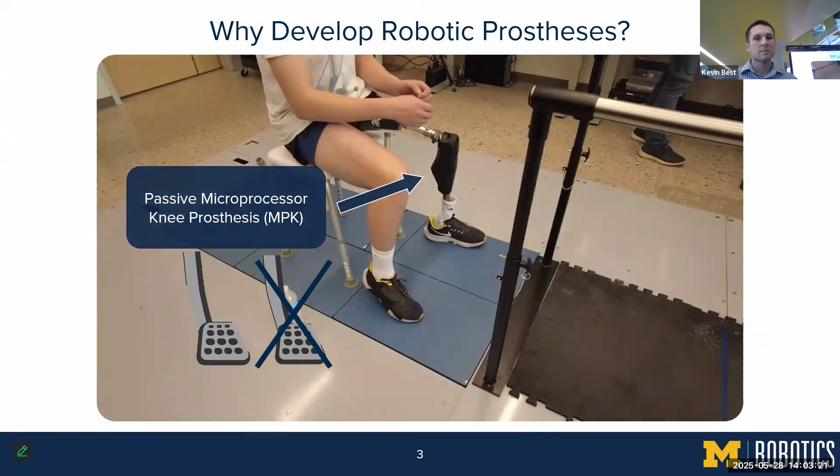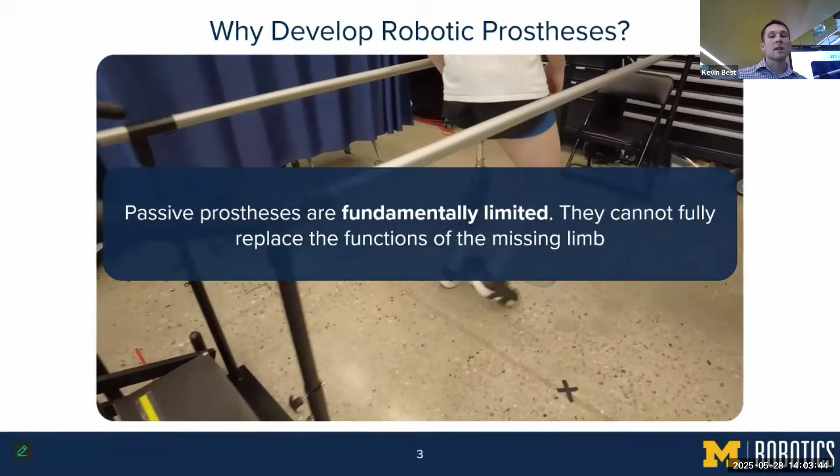This is like in your car if you only had a brake pedal and didn't have a gas pedal. And what this means for the user is that they have to compensate with their intact joints, which can lead to gait asymmetries, increased metabolic cost, overuse injuries, and overall less community engagement. So you can see this participant has to take much bigger steps with his right leg compared to his left, particularly on the ramp. And all passive prostheses, regardless of their complexity, are fundamentally limited. They cannot add energy into the system like biological muscles do, and so they cannot fully replace the functions of the missing limb.

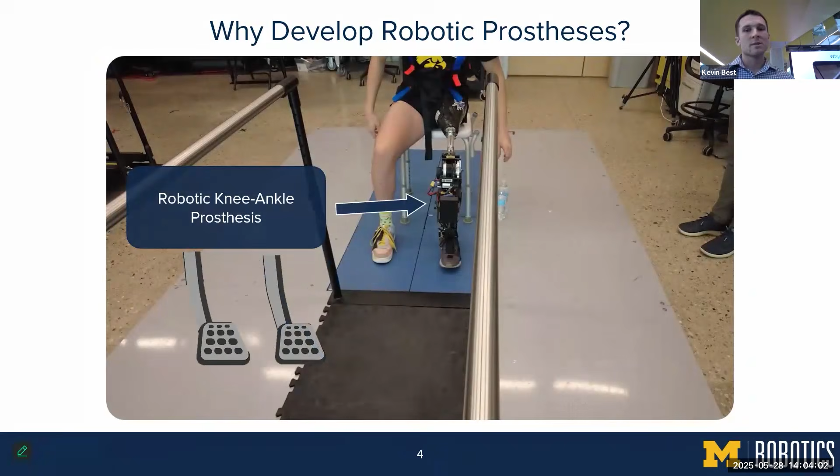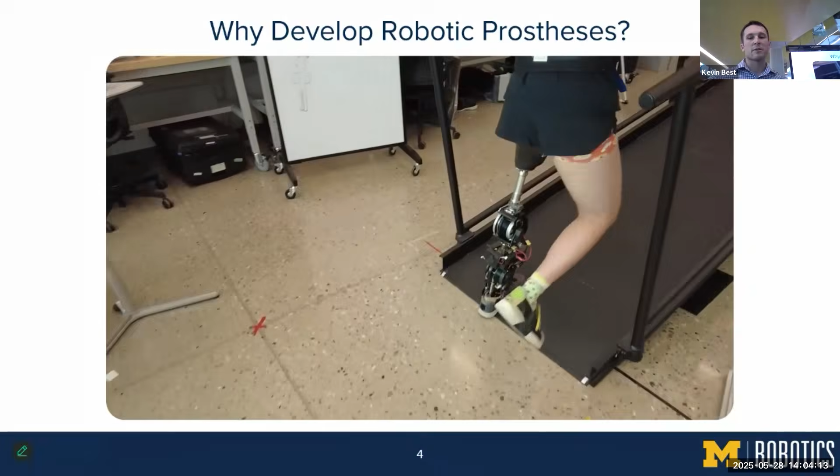In contrast, the motors in robotic prostheses allow them to both resist and create motions. This is like having both the brake pedal and now a gas pedal. And so this helps the participant walk with a more symmetric gait. So you can see that when he gets to the ramp, he can climb with more equal step lengths on both his left and right legs compared to with his passive device. And there are many other potential benefits of this, including reduced energy usage and reduced strain on the intact limb.

So if powered devices have these benefits, why do people still use passive ones? There are only 3 commercially available powered knee prostheses on the market, and none of them have much market share. And as far as I know, there are no combined powered knee ankle prostheses available for consumer use. I'd argue that this is because developing a really effective robotic prosthesis is difficult. There are hardware challenges. It can't be too loud or too heavy.

It has to fit inside pants. These are all real design challenges that are hard to achieve. There are economic challenges. You have to be able to design and manufacture them at prices that the market can afford. And there are also software challenges. It's hard to write control methods that robustly and effectively assist users throughout their day. And this final point is the fundamental problem that I've worked on during my PhD: how do you make these robotic prostheses do what the user wants at the right times in a way that's helpful?

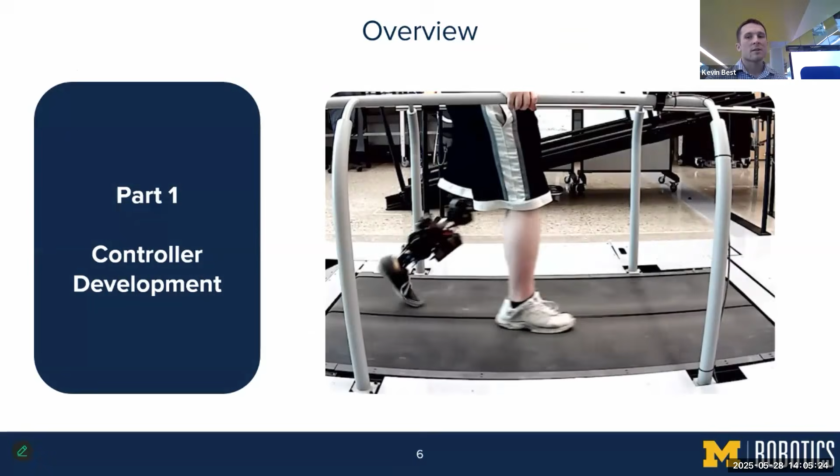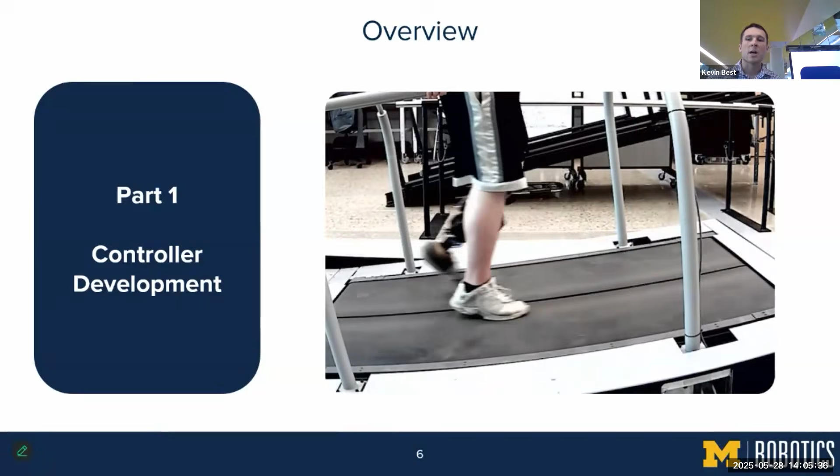In my talk today, I want to share 3 main ways I've been working towards advancing robotic prosthesis control. In part 1, I'll walk you through the control methods we developed to more effectively control a robotic prosthesis while maintaining its clinical viability, and what that means and why it's important. In part 2, we'll look at clinical benefits and explore how the control methods from part 1 can bring tangible benefits to users. In part 3, we'll look at how these controllers respond to gait perturbations that could occur in real-world ambulation, and how our control choices affect the user's ability to withstand them.

Often our goal here is biomimicry. What we mean by that is that we want the leg to behave as if it were a healthy biological limb. So this will be our North Star throughout this first part of the presentation.

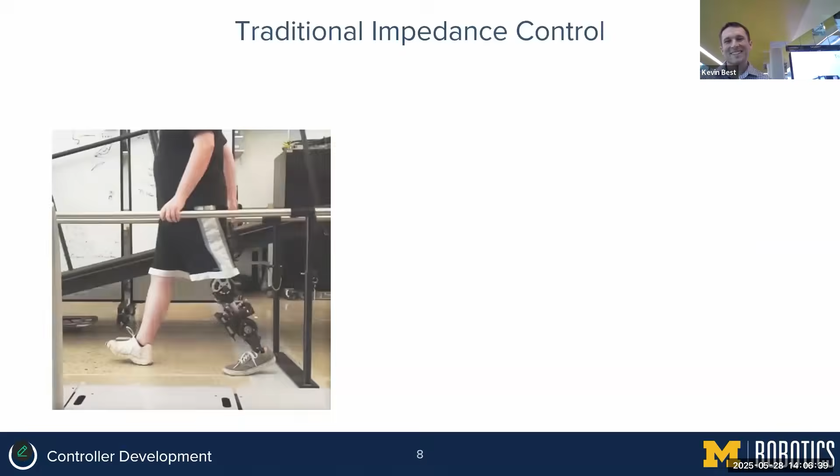A traditional way to select F is to make the prosthesis joints behave like spring damper systems using an impedance control law. It calculates the joint torque tau based on the current joint angle theta, the current joint velocity theta dot, and 3 tunable impedance parameters: the stiffness K, the damping B, and the equilibrium angle theta EQ. To make the leg behave as desired, you change the values of these impedance parameters over time based on discrete gait events.

Often these controllers need user-specific tuning, in which a clinician would watch the user walk and tweak these values until the desired gait is observed. While this can work really well and create fairly biomimetic behaviors, the ideal parameters depend on the activity, which means many parameter sets and tuning sessions are potentially required to get optimal biomimetic performance across various tasks. In a clinical setting, this would be pretty difficult, as it would take a lot of time, equipment, and engineering knowledge that a clinician might not have.

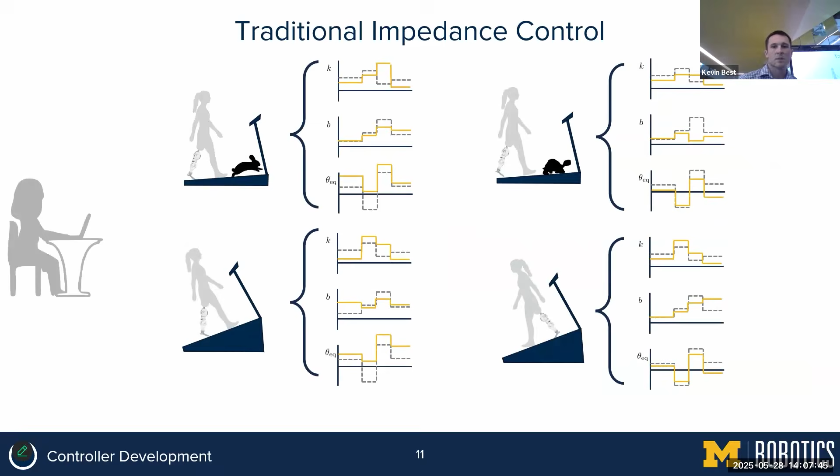I would argue that relying on manual expert tuning to achieve biomimetic performance isn't clinically viable. What I mean by that is if I went to the prosthetics and orthotics clinic and said, hey, I have this great new device, but you have to add 3 to 5 hours to every fitting appointment so we can make it work, they probably wouldn't be interested.

So instead, what we want to do here is create an alternative framework that can still create these biomimetic behaviors, but without that manual tuning burden.

Back in 2021, Emma Reznick collected a data set of able-bodied people walking at various speeds and inclines. Our general approach is to use this as demonstration data to construct a mathematical model of how people walk. Once this model is trained, we can use the sensor measurements from onboard the prosthesis, pass them through the model, and have it output the desired prosthesis behaviors. This way, we can rely on actual data to create our desired biomimicry without manual tuning.

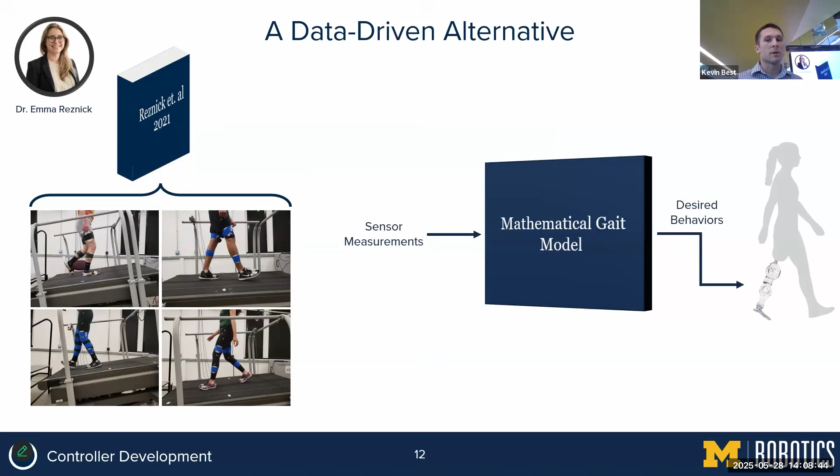So what do I mean by behaviors? In this first work, we used a method that Kyle Embry had developed to model normative joint angles, also known as the kinematics. To control the prosthesis, we would simply take the output from this model, which may tell us that the knee should be nearly fully extended and the ankle should be slightly dorsiflexed, something like that. And we would use the motors to drive the leg to that configuration. This is called position or kinematic control.

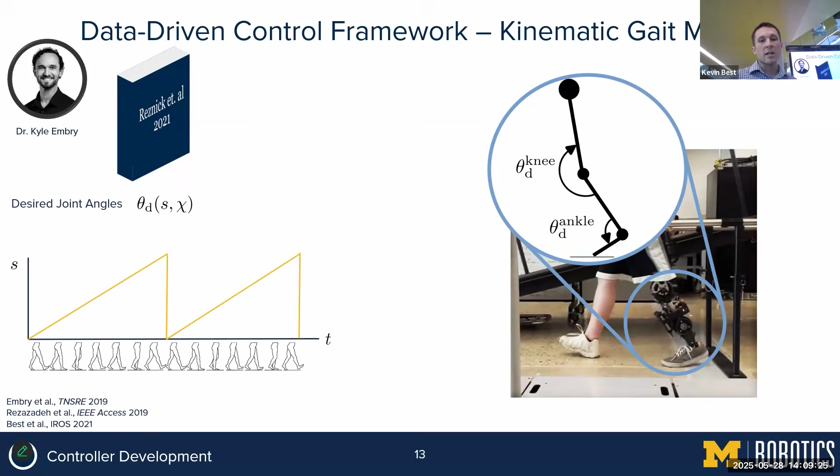And Kyle's model took 2 inputs. The first is a phase variable S, which estimates where the user is within the gait cycle. You can think of S as going between 0 and 100% completion of each stride, and during steady walking, it'll look like this sawtooth wave. Siavash Rezazadeh showed us previously that we can calculate S based on the global orientation of the user's residual thigh, which has this sinusoidal shape during walking.

If we divide this trajectory into two parts, a descending part on the left and an ascending part on the right, and we flip that descending part over the x-axis, we get something that resembles this phase variable. What's nice about using a phase variable is that the user still has control of their thigh angle, which indirectly gives them control over the prosthesis.

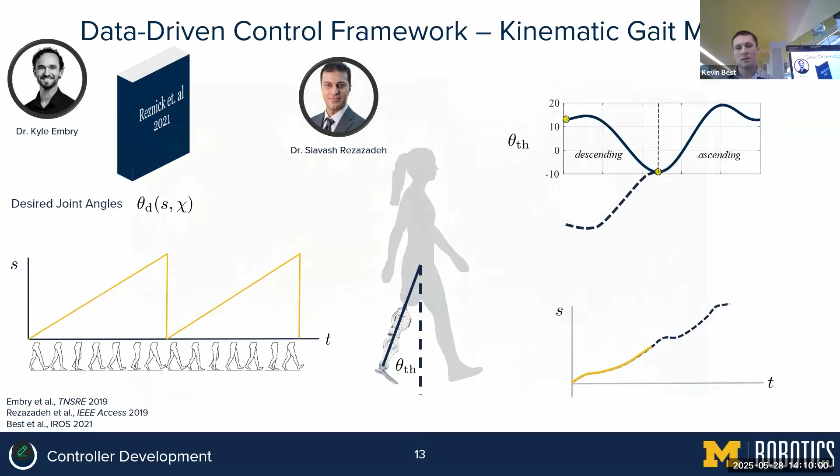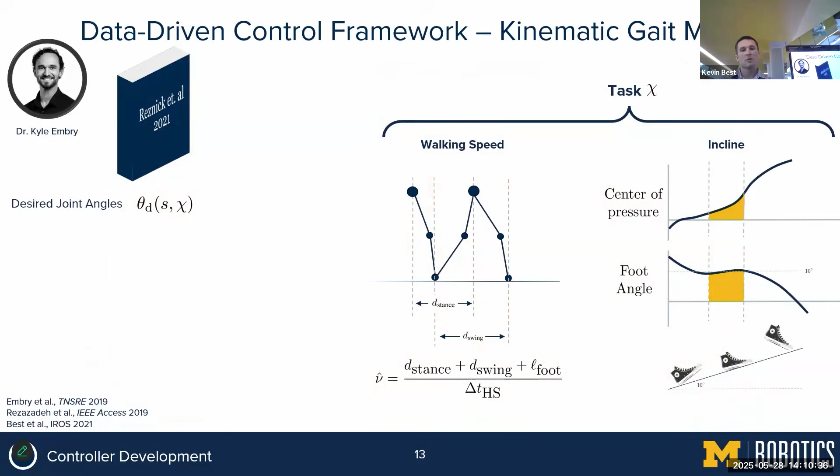So the second input is a task variable, which we defined as the walking speed and the ground incline. And just like phase, we developed algorithms to estimate these online using sensors just from onboard the prosthesis. For time's sake, I'm going to skip over how they work, but I'm happy to talk about them later.

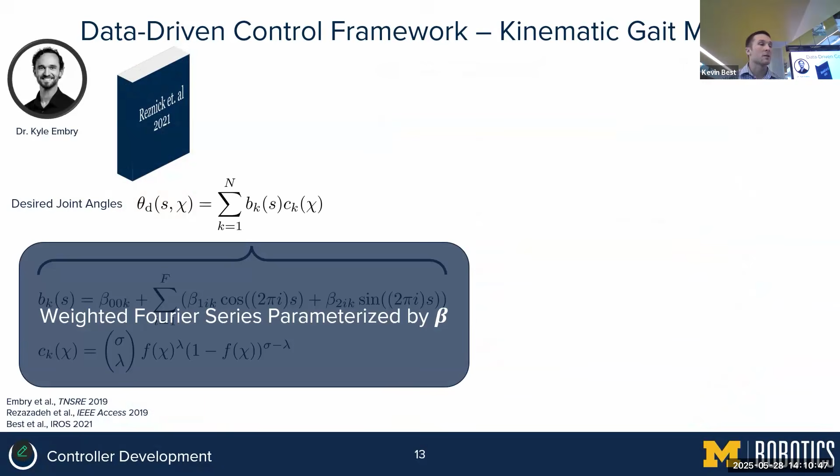So given these inputs, the model computes a weighted Fourier series where the different Fourier terms are dialed in and out based on the task variable. Fourier series are a good fit here because they inherently capture the periodic nature of gait.

So using some convex optimization to solve for these beta terms that parameterize the model, we can fit it to the joint angles in the data set, producing this continuous surface that describes normative able-bodied joint angles and how they evolve across the gait cycle for different speeds and inclines. And then we can simply use PID joint controllers to drive the prosthesis to those references.

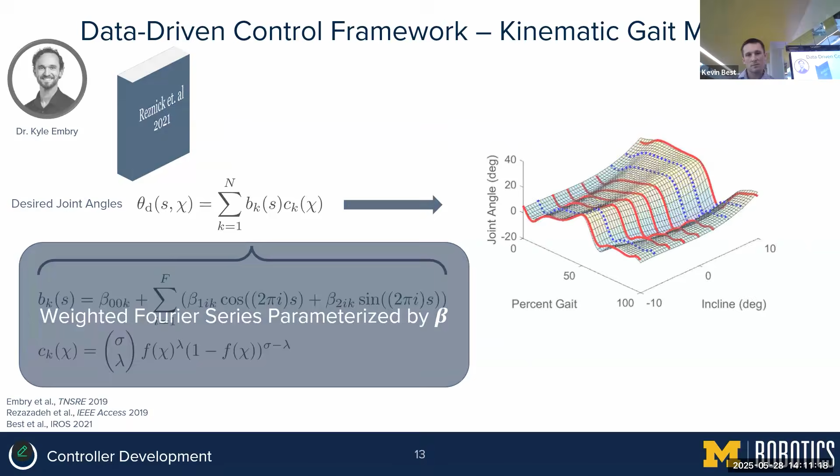So we deployed this controller on the prosthesis and it worked fairly well. It could automatically detect and adapt to varying speeds and inclines and produce the appropriate behaviors. You can see how old these videos are because the floor around our treadmill wasn't finished yet. That's why I'm inside this kind of 2x4 fence.

But while it mostly worked and we presented it at IROS, we did notice two problems that you might have picked up on. The first is the leg appears to pause right at toe off. You can see the knee and the ankle stop moving ever so briefly right when the foot comes off the ground. And this sudden deceleration didn't feel very good, nor was it biomimetic.

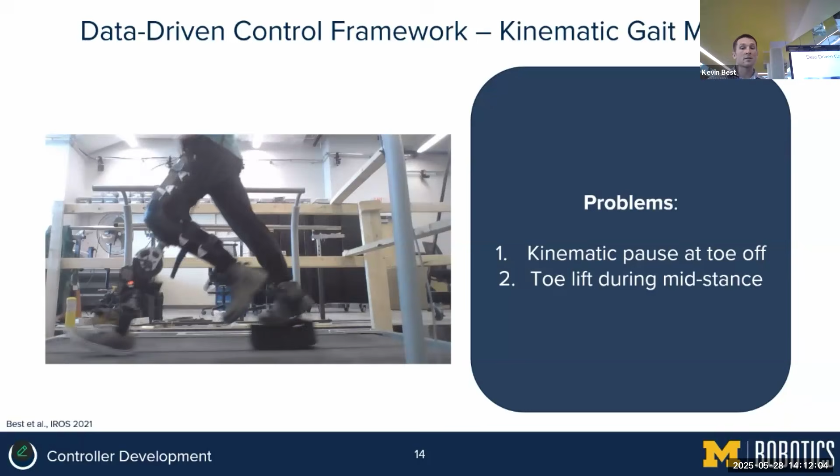Another issue is that the ground interaction wasn't quite right. So if you look closely at the foot during stance, you'll see the toes rise and then fall again, which creates a non-biomimetic ankle torque profile that is unsettling to walk on. That's shown in green. So we tried to address these two limitations in our next work.

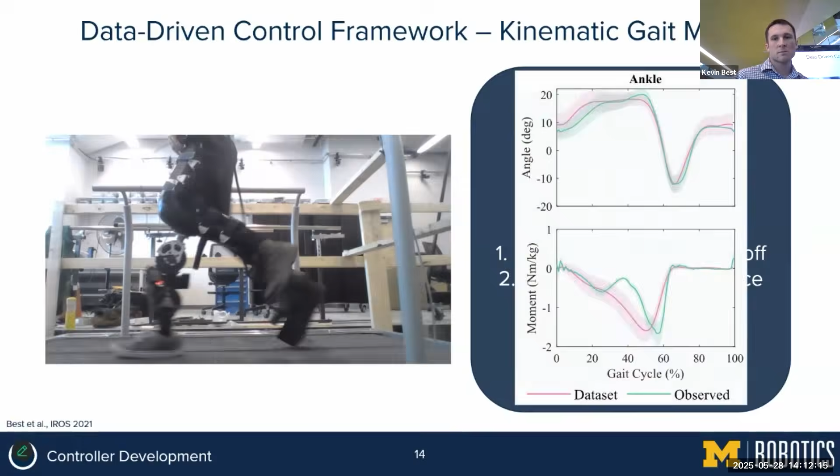The first problem, the joint angles pausing right at toe off, was due to how we calculated the phase variable. This spot in the middle where the thigh changes directions causes the phase variable to momentarily pause, which in turn stops the commanded joint angles from progressing.

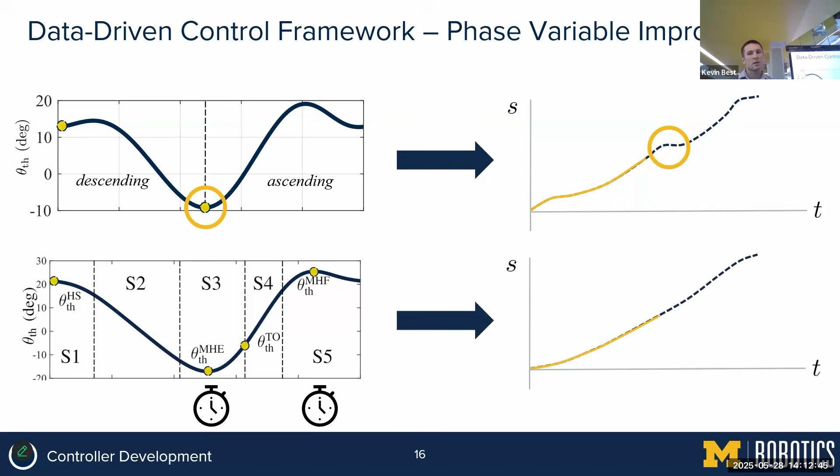To fix this problem, we divided the gait cycle into more sections, and we used time to control the phase estimate progression during the portions of low thigh velocity. And what this did is it removed that pause in the phase trajectory, producing a signal that's more like that ideal sawtooth wave that we're looking for.

To fix the non-biomimetic ground interaction and the ankle behavior, we switched from the kinematic control paradigm to an impedance control paradigm. And we did this during the stance phase because the spring damper behavior of an impedance controller allows the foot to better comply with the ground and create that natural behavior.

So rather than controlling the joints to follow desired kinematic trajectories, we instead controlled their dynamics by modulating the stiffness, damping, and equilibrium angle.

But to make this change, we needed something to replace the kinematic model. So rather than outputting desired joint angles, we need a new model that takes in gait phase and task, and instead gives us stiffness, damping, and equilibrium angle. Remember, these are the parameters that are typically hand-tuned in the traditional impedance control approach.

This time, we chose to model them using a linear combination of polynomials. Since we're only modeling the stance phase, we don't need the model to be periodic. And we chose polynomials because they're good approximators of arbitrary functions, and their parameters enter linearly.

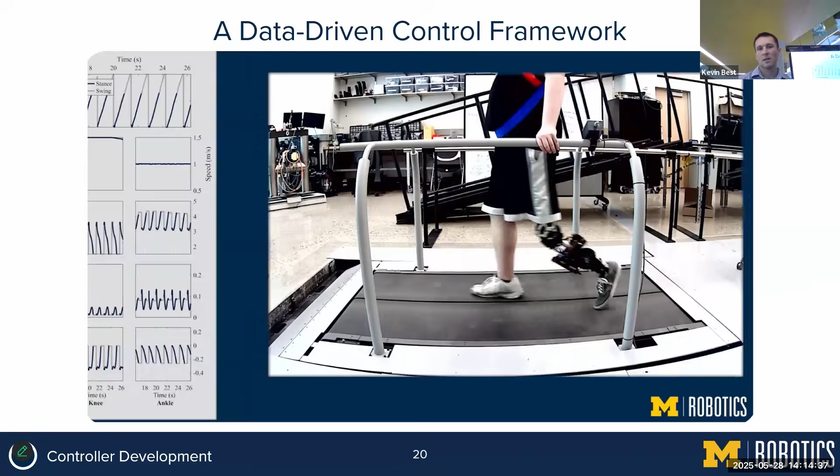We again implemented the controller on a prosthesis and had a few participants try it out. You can see that our impedance parameters on the left are continuously evolving based on the estimated task and gait phase. If I let this video run for a little while, the treadmill will change speed and incline, and the prosthesis's behavior will adapt to match it. Compared to those kinematic control videos I showed you earlier, you can see that we fixed both the pause at toe off, as well as that ground interaction, so the toes are no longer wobbling.

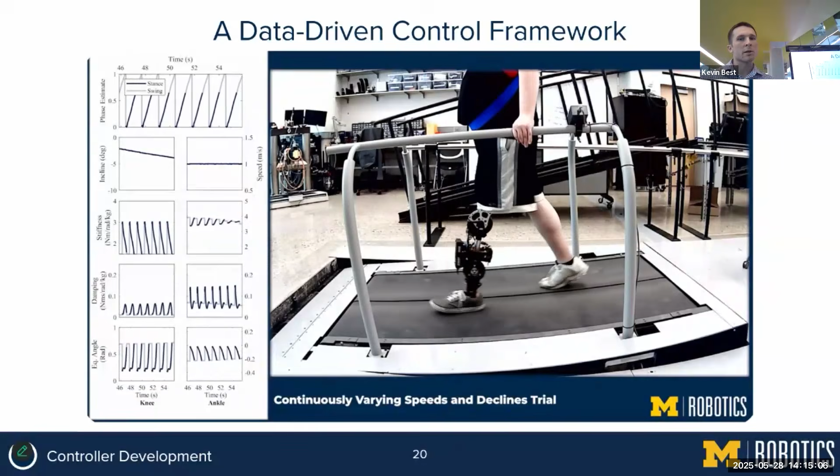To show that we didn't lose any performance relative to the hand-tuned impedance control approach, we implemented both controllers and ran a series of experiments.

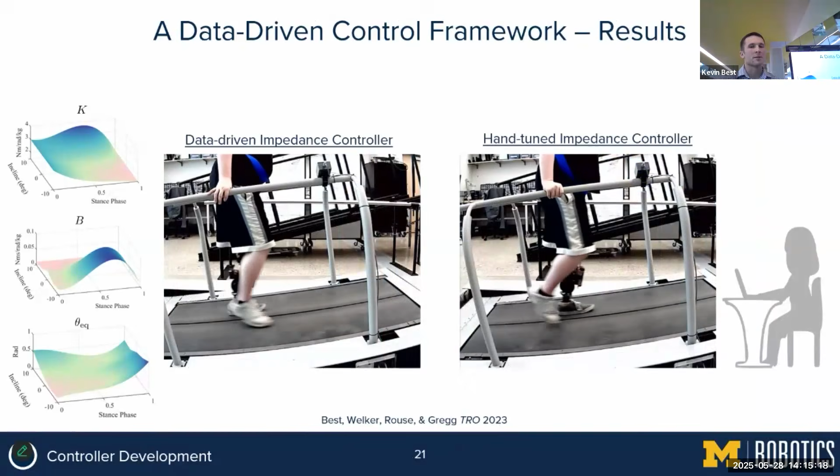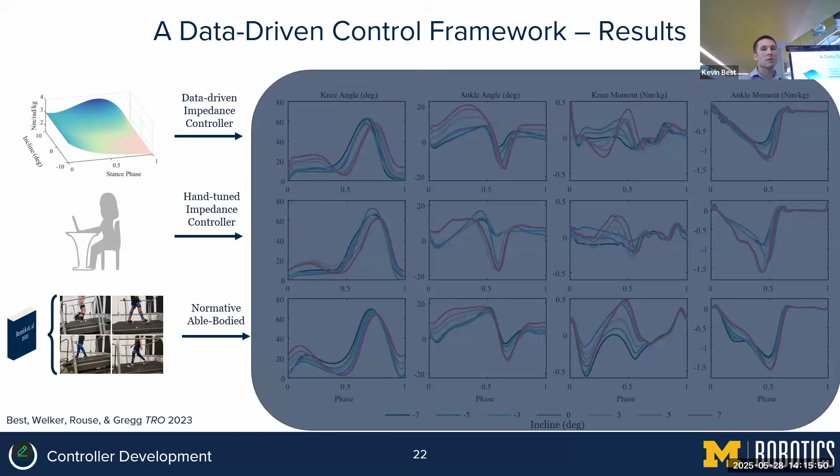When we compared it across both the knee and ankle, kinematics and kinetics, we found that our data-driven approach was as good as, if not better than, the hand-tuned approach of replicating normative able-bodied joint motions. And the key here is that it did it without requiring manual tuning, maintaining its clinical viability.

Following these positive results, Cara and I then expanded this approach to sitting and standing from chairs of various heights. Then Ross and I applied the same framework to stair ascent and descent with similar positive results. So we're able to create these normative biomimetic joint patterns all by learning models based on able-bodied demonstration data instead of relying on manual tuning.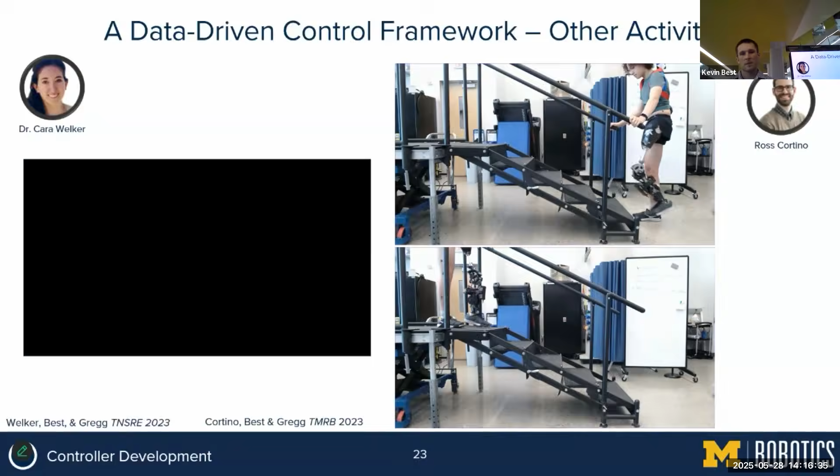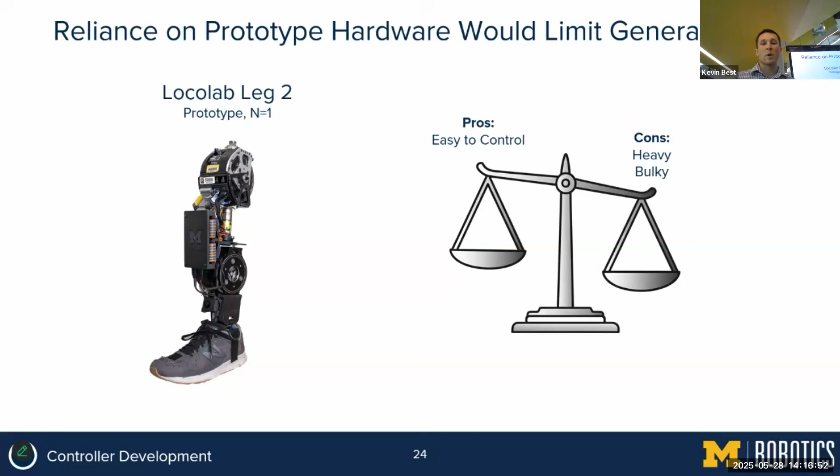While our results were really promising, everything I've shown you so far was demonstrated using the same prosthesis. Leg 2, as our lab creatively calls it, is a device that was intentionally designed for easy control, but it also has other practical limitations of weight and bulk that may prevent the design from going home with someone. And if we want our controller to have actual real world impact, we need to show that it can generalize to other devices, and that its success isn't wholly reliant on this specific hardware design.

I want to give a quick example to help motivate why these hardware properties might matter. One important property is the prosthesis's actuator inertia, which roughly speaking can be understood as its resistance to rotational acceleration. You're likely familiar with adaptive cruise control algorithms, which try to keep a fixed following distance between your car and the car in front of you.

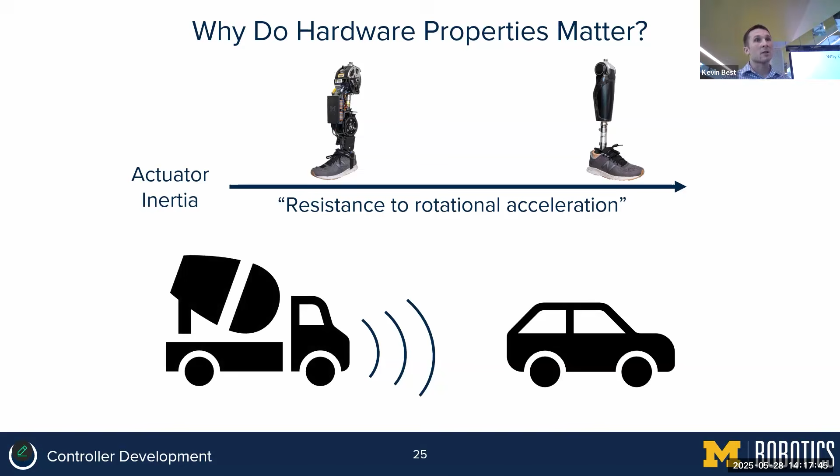Let's say you wrote this algorithm and it works very well for this specific car. If I tried to directly use the same algorithm on a much heavier vehicle, you would likely have problems because it might not brake or accelerate hard enough. You'd likely need to consider this extra weight and modify your control algorithm to get the same performance. So for the same reasons, actuator inertia matters for prostheses.

Leg 2 is specifically designed with minimal actuator inertia, which is part of the reason why it's so bulky and heavy. In schematic form, its dynamics look like this, where the main thing is just inertia, and it's quite small. Other devices we use in the lab, such as the open source leg and the Össur Power Knee, are lighter and more compact, but that comes at the expense of potentially more complex drivetrain dynamics.

So let's take a look inside the open source leg, which Senthur and the OSL team created with specific design objectives that were different from those when leg 2 was created. The whole point of the OSL project is to accelerate research like my own by providing a common and accessible hardware platform to the field.

This means that their design prioritized a low number of custom components, used off-the-shelf parts wherever possible to keep costs down. This makes the OSL easier to machine, assemble, and afford, but it also introduces some complexity to the drivetrain.

Each joint here has its own actuator, shown in this pale yellow color. These actuators have their own internal transmissions, which have their own dynamics. They drive an additional belt transmission that ultimately moves the joints. And it turns out when you load this belt, it stretches.

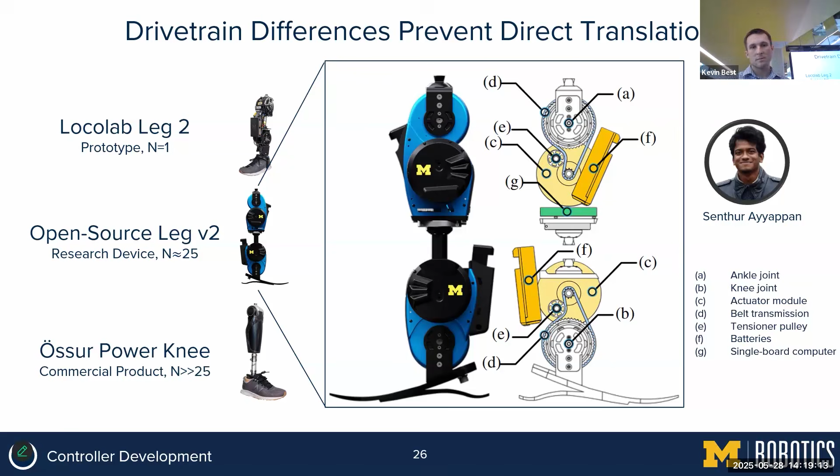So when we characterized and modeled the full OSL drivetrain, we found that its dynamics look a bit more like this, with more inertia, damping, and friction, and this variable stiffness series elastic actuator that we need to deal with.

Luckily, we found that the same model does a really good job of describing the power knee's dynamics. So if we develop a method to account for them, we can apply it on both systems.

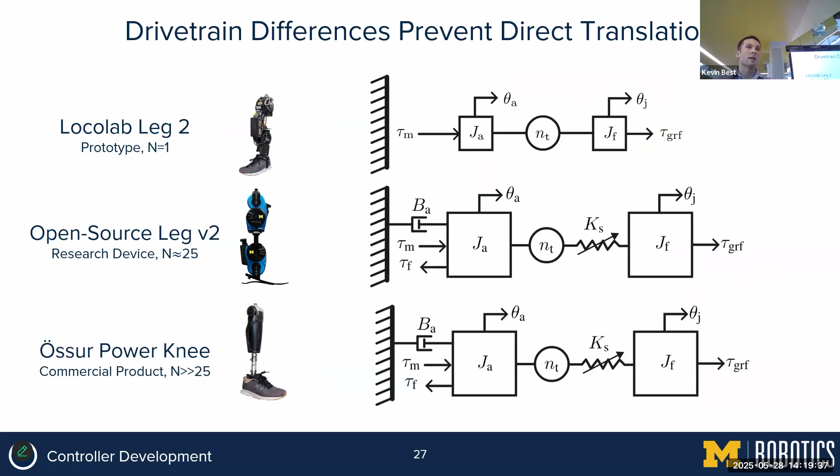Put in equation form, we want the closed loop dynamics to follow this impedance behavior on the left. Our real dynamics look something like this, where we have belt springs, friction, damping, and inertia getting in the way. Don't worry about understanding these equations, just know that they're different.

So Gray and I tackled this problem by developing a new method where we first select our motor command to cancel out the actuator's friction.

When you do this, our closed loop dynamics reduce to this, leaving just damping, actuator inertia, and the spring to deal with. Note here that these dynamics are linear in the state variables, and linear dynamics are good because they allow us to apply tools from classical control theory.

Particularly here, we're just going to use traditional pole placement techniques to shape our dynamics to get as close as possible to the desired behaviors.

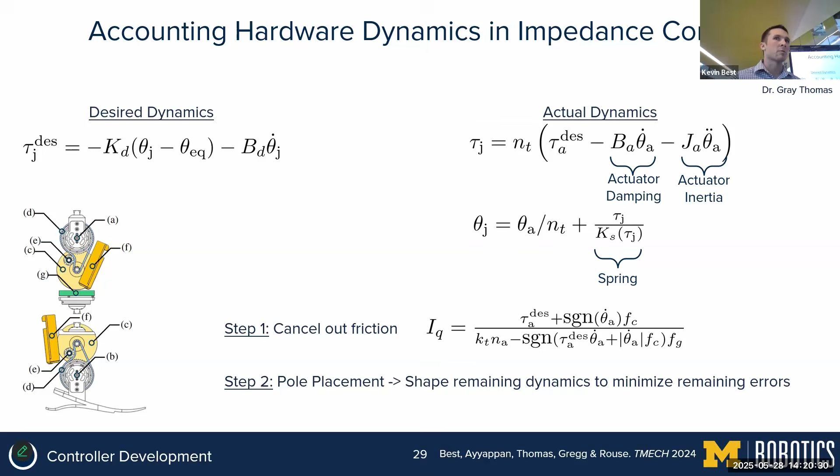If you're familiar with Bode plots, our desired closed loop dynamics are shown in this dashed blue line, while our system's real dynamics are shown in green. We can select our pole locations in our actuator state feedback controller to get our actual dynamics as close as possible to the desired.

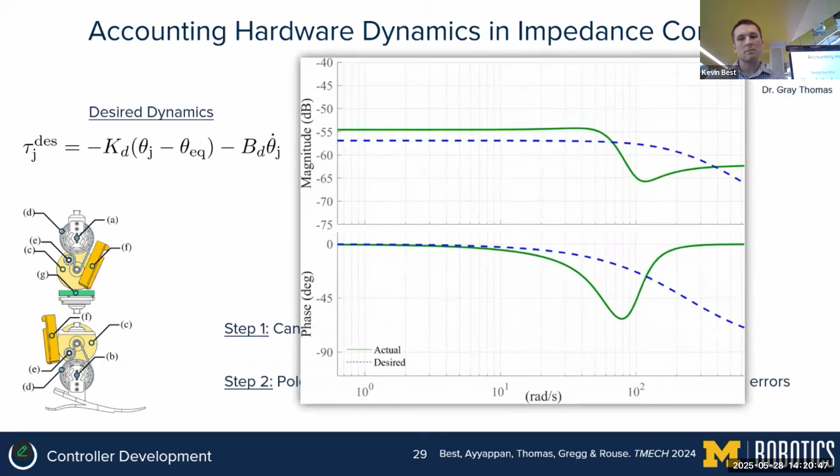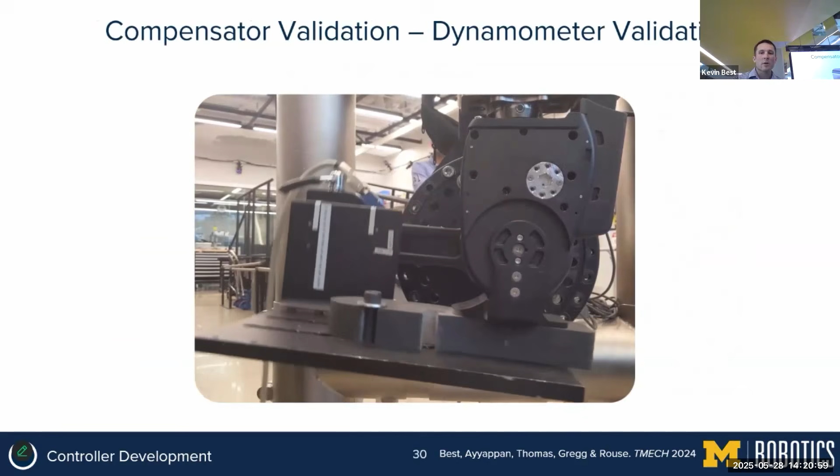To validate our compensation method, we mounted the OSL ankle to a mechanical dynamometer, which you can see in the window actually right over there, which interacted with the joint and measured its torque response.

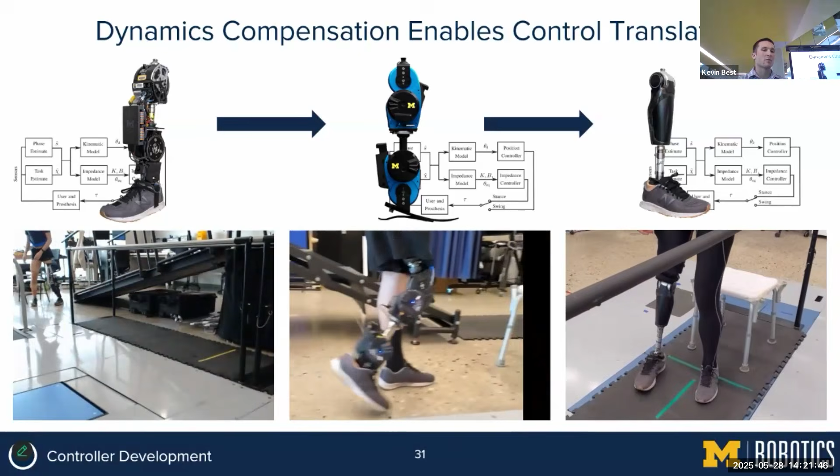Nonetheless, we were able to take the same control framework that we had developed on leg 2 and transfer it to these other two devices by accounting for their more complex drivetrain dynamics. So we can get the same behaviors across all three devices.

Now that we had this controller running on these different devices, we wanted to look at how it could provide meaningful clinical benefits to users.

So why do we care about clinical benefits? At the end of the day, insurers who pay for most prostheses are really only interested in new devices if you can show them that it'll improve someone's health and cost them less over the long term.

Unfortunately, when these investigations have been done in the past, robotic legs haven't demonstrated strong benefits. Now, this could be due to the control limitations of traditional approaches that we talked about before, but it also may have to do with the tests we're performing, and there may be benefits that existing clinical tests don't capture.

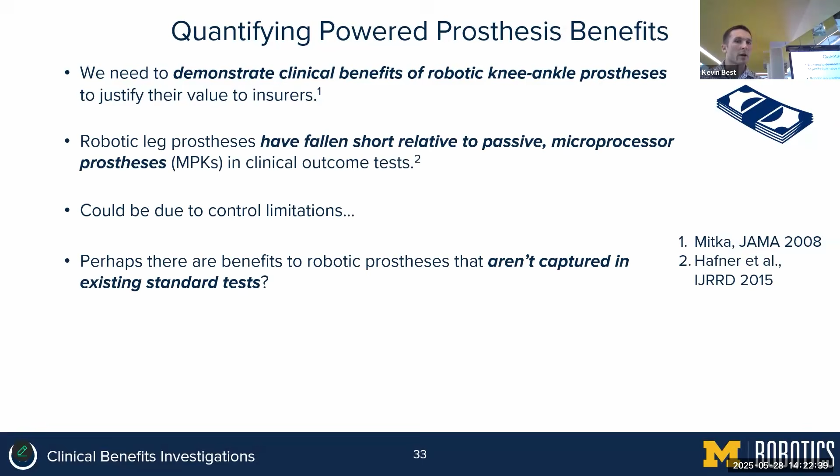Most clinical tests are time-based and performed at a low exertion level, and we're curious to see what would happen if we increase this exertion level and look at more endurance-based metrics like step count or distance traveled.

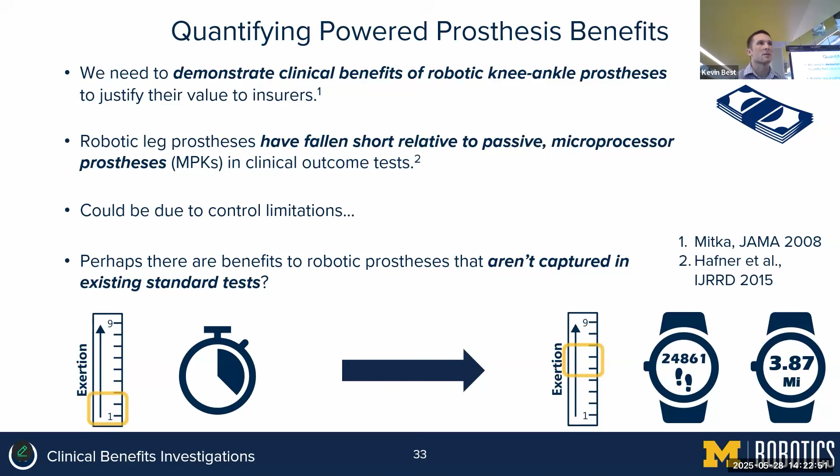So we performed a case study where we asked an individual to complete up to 15 laps over our ambulation circuit as fast as he could. He repeated it four times, twice with his passive everyday prosthesis and twice with our robotic leg.

Here's a quick speed up view of this test. You can see that he goes up the ramp, down the stairs, sits down, and goes back the way he came, over and over again.

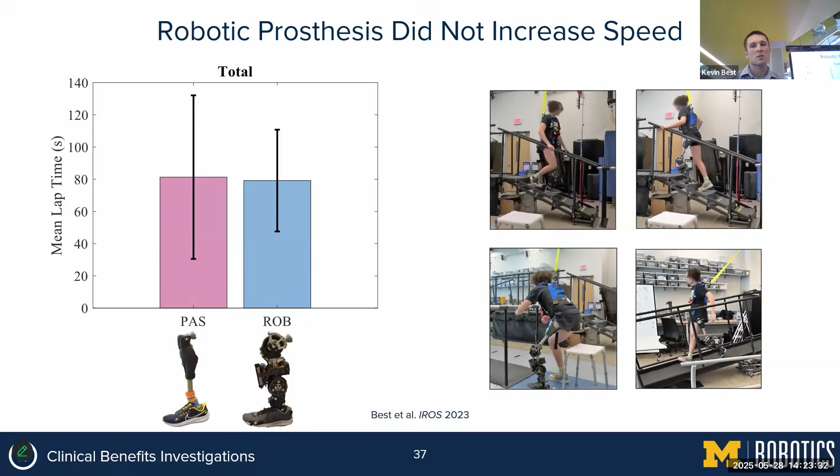As expected, we didn't see a time improvement, with the robotic device in blue producing around the same average lap time as the passive device in pink. So if speed was our success metric here, this would again not be a positive result for robotic prostheses.

Even if we look within each activity, because you may think, okay, going upstairs with a robotic prosthesis should at least be faster, we still didn't see that it was faster than the passive device in any of these cases.

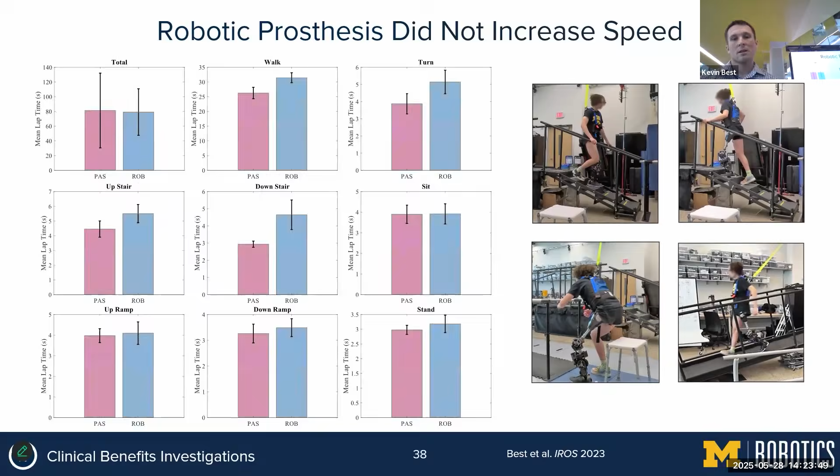However, we did see that the participant was able to perform many more laps with the robotic device, showing that it did provide him with an endurance benefit, just not one that would be captured in standard clinical tests.

So our research group has gone on to show quite a few ways that Leg 2 can provide clinical benefits over passive prostheses, and I've listed many of them here. However, this is an N=1 research device, and again, if we want to maximize our clinical impact, we have to show that we can produce similar results on a commercially available prosthesis, like the Össur Power Knee, because this could actually go home with someone. But the question is, if we translate the same control algorithm, will the clinical benefits follow?

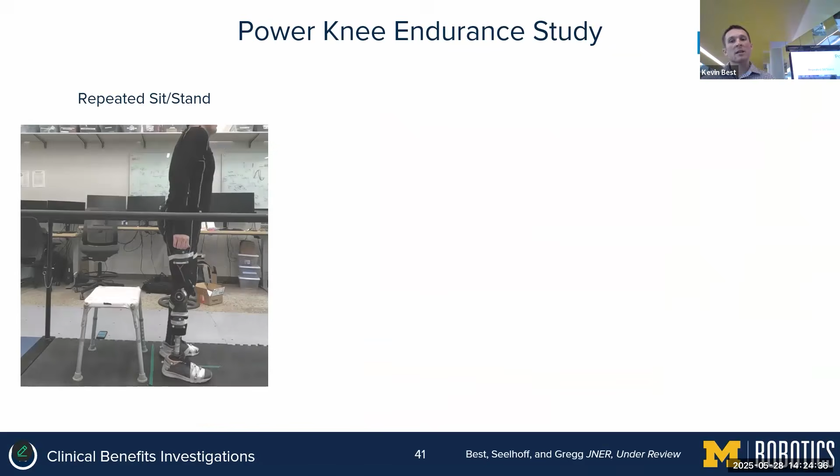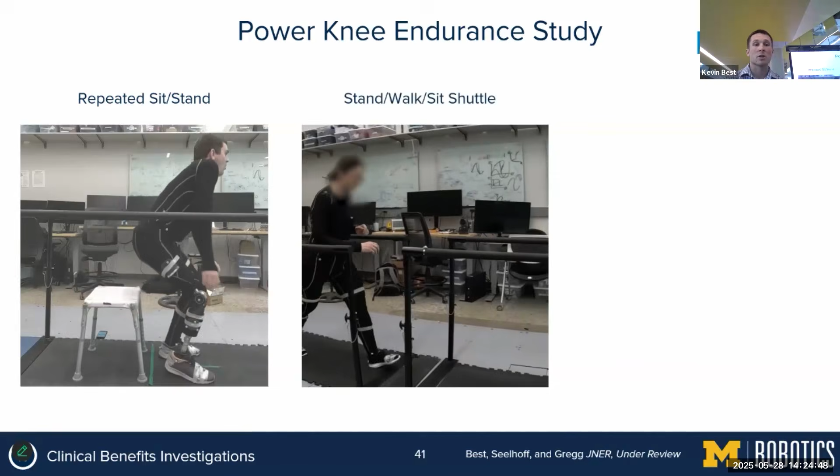So to begin answering this question, we partnered with Össur, who sent us one of their power knees to reprogram with our control method. We ran a study involving repeated rapid sit stands, a repeated stand, walk, sit, shuttle test - and if you ever did the pacer test in elementary school, that's what inspired this test - and a fast 15-minute walk on the treadmill.

Based on what we found in that case study, we made sure that each of these tasks was high intensity and would be fatiguing, to try to leverage any benefits that might show up.

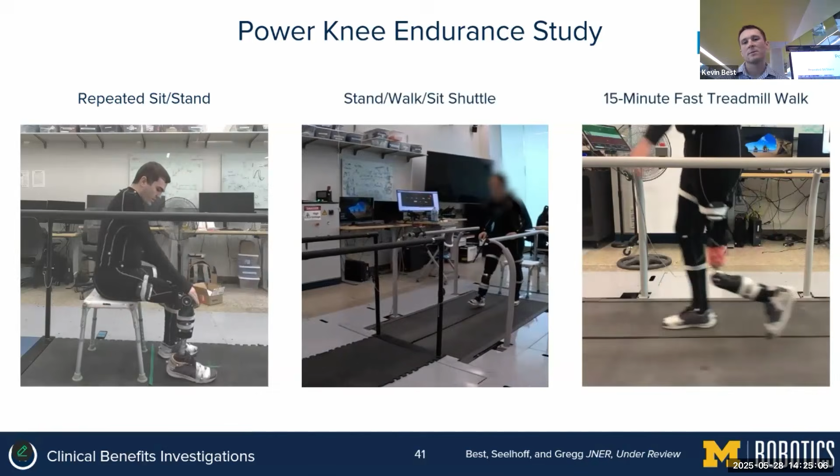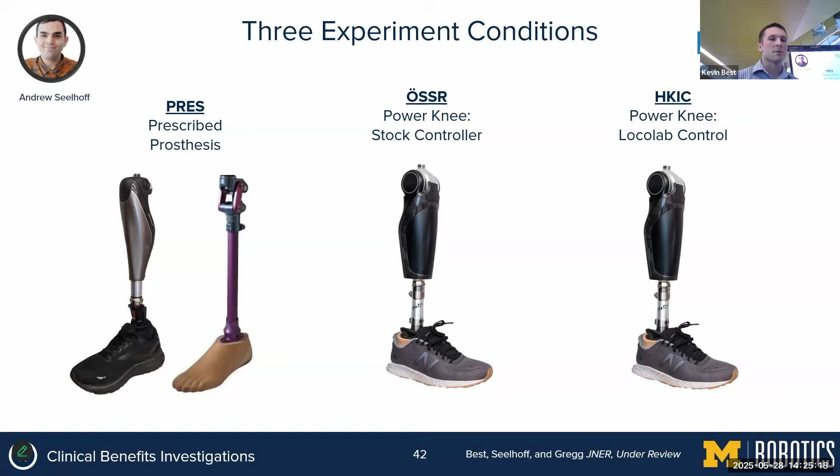Participants repeated this experiment under 3 conditions. The first was with their passive device - for most participants this was a passive microprocessor knee, but we did have one participant with a purely mechanical knee. The other condition was with the power knee but using the factory default software, so if you were to buy the knee from Össur, this is how it would behave. And then finally, using the power knee but with our custom control software.

This video shows one of the participants performing the repeated sit-stand test under each condition, where passive is on the left, the power knee with the default controller is in the middle, and ours is on the right.

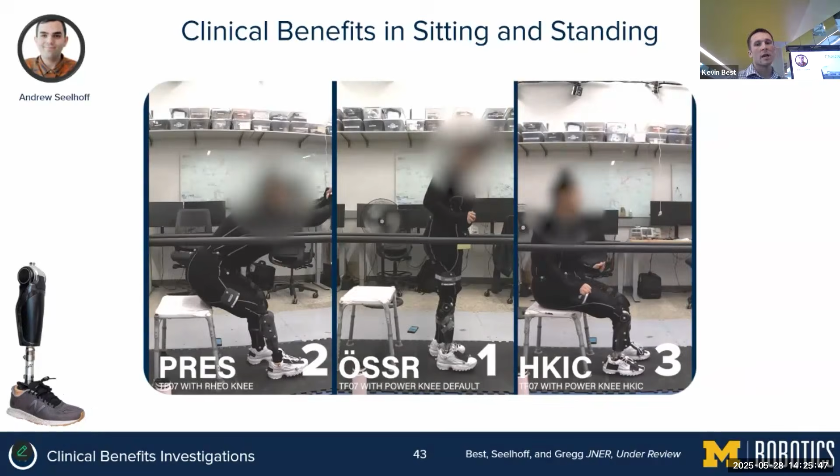This plot shows the ground reaction force asymmetry with our controller in teal and the default controller from Össur in purple. These are both normalized to the passive condition, so lower is better here, with negative values meaning reduced asymmetry compared to the passive condition - the user is using both legs more equally with lower values. We observed that the power knee under both conditions improved this GRF symmetry, but with our controller it created the largest effect.

This plot likewise shows the average time required to complete a sit-stand cycle, again normalized to the passive condition. So lower values are better, as reduced cycle time means increased maintainable speed. Our control approach again increased the speed, where the default controller from the factory actually reduced the sit-stand speed.

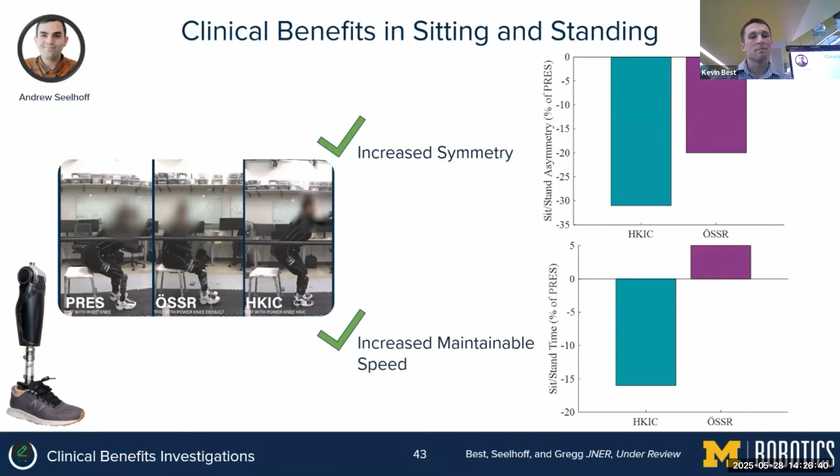We likewise observed clinical benefits in walking. We saw that the power knee under both controllers elicited better biomimicry. This plot shows that we got increased ankle plantar flexion torque that's more similar to able body, just by actuating the knee joint.

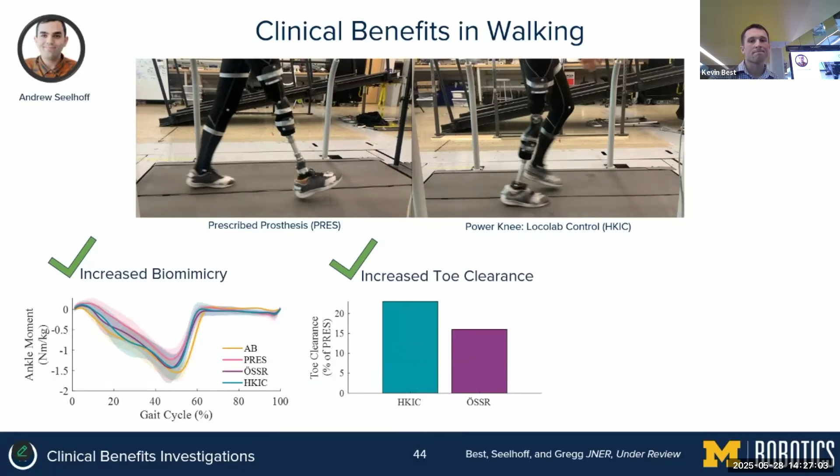We saw an increase in toe clearance, which is important for preventing tripping. And we saw a decrease in the peak hip flexion torque, which means the user didn't have to work as hard to swing their prosthesis forward after each step. In most of these metrics, we saw that the power knee helped in either case, but that our controller created the largest effect size.

Next we gathered qualitative feedback from the participants about how they felt about these two controllers. Here's one participant's thoughts on the power knee in general and how he thought it would improve his life.

No doubt in my mind, especially if you're a more recent amputee, like mine's only been 5 years. I'm kind of used to this one now. Having something like that would make my life so much easier. It's all of them, but being able to stand up without using my hands, to push myself off or balance myself to get up out of a chair, that's phenomenal, absolutely phenomenal. Walking, it doesn't take me as much energy to go as far as it would with this non-powered knee. So I think over the long term it's going to make me more active because I enjoy walking. I enjoy moving around, but when it gets to the point where it's just too difficult for me to do, I'm not gonna hurt my body for it. And I think that a power knee or something similar to that would be able to just let me enjoy more.

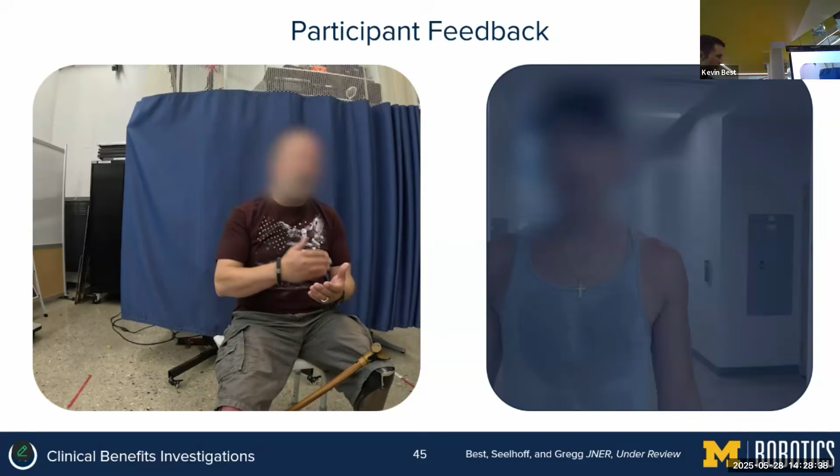We do need to take qualitative feedback from participants like this with a grain of salt, because people can sometimes be biased to enjoy the new devices, and they can try to please the researcher by telling us what they think we want to hear. But in this case, this participant, as well as one other participant in our study, actually went to their prosthetist following the study and asked to be switched to a power knee. So to me, that's very honest evidence that they felt like it was giving them at least some kind of benefit.

Next, we're going to hear from one of our younger participants about how the controller improved his walking gait compared to how it was with the default power knee software.

Especially with walking, I felt like once you could get into that good rhythm of a good gait, it felt very natural. I walked relatively recently, like a couple of years ago, with both legs, and it felt kind of like that natural two-legged walking. So I would say today, when I was able to do it correctly, it kind of mirrored that, where I was able to walk almost perfectly, or naturally.

So it's cool to hear his perspective and that he could feel some of these benefits that we're measuring about his gait, and he could internalize them.

When we transferred the control algorithm to the power knee, we found that many of the same clinical benefits transferred as well, including some new ones we hadn't seen before. The only one we had yet to show is increased ambulation endurance, partly due to some overheating problems we had with the power knee hardware. We're hopeful that in the future, with some clever experiment design, we could show this as well. We basically pushed the hardware harder than it was meant to go to compress the experiment into a lab-based session.

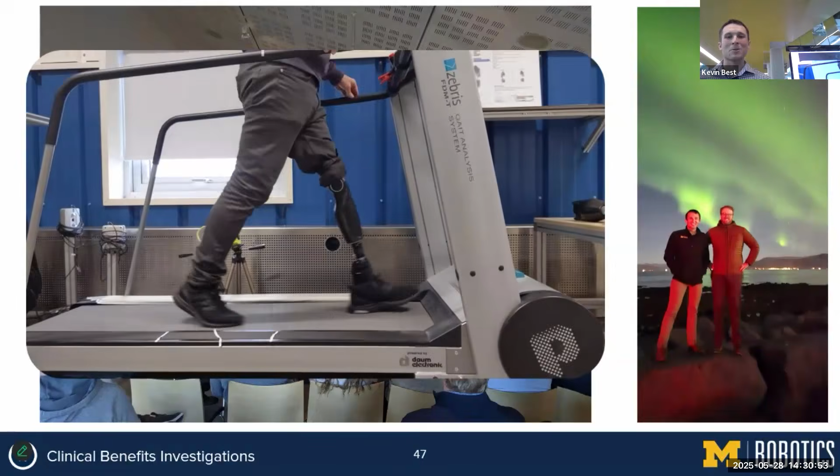Bobby and I got to go to Iceland and present our results to the engineering and clinical teams at Össur, and we had a really great time. We even got to have one of their employees, who tests a lot of their new devices, walk around on it for a few hours and give us feedback, and he had some really great insights that were useful for us. We learned a lot, and this was one of the most fun experiences that I've had in grad school.

Okay, so in this final part, we're going to talk about how the decisions we make from a control perspective influence the prosthesis' ability to handle unexpected gait perturbations.

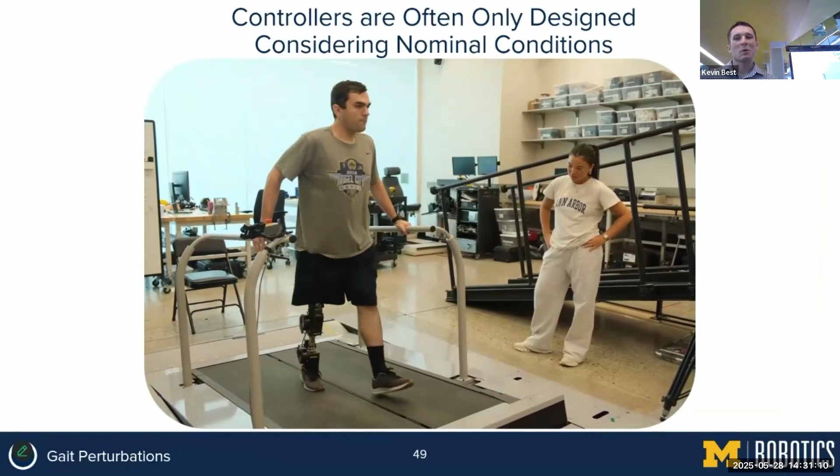Why do we care about gait perturbations? We often design and test our prosthesis controllers in only controlled, nominal conditions, like in a lab and on a treadmill like this. But when we send someone home, real life is messier and less structured. We often don't think about real world situations, like tripping on an unexpected object or walking over uneven terrain, which need to be handled appropriately by the prosthesis. The human body can do this really well, and if our prostheses are going to be biomimetic, they should be able to also.

To understand how a prosthesis would respond to these conditions, I need to introduce the concept of mechanical joint impedance. Mechanical impedance determines how perturbing motions imposed to the joint are opposed by changes in torque. So if I take this joint and move it upwards, the impedance tells me how the prosthesis is going to resist that motion.

There are a few key facts about impedance that are helpful to know. The first is that from perturbation experiments like these, we know that humans exhibit consistent impedance patterns while walking. That is, when you perturb them, they have consistent torque responses. This suggests that impedance likely performs an important functional purpose, and we may want to consider replicating it in our prostheses.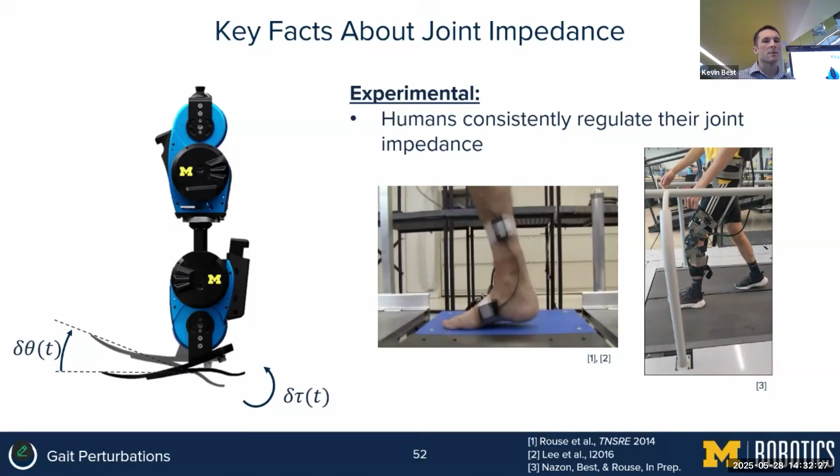Second, we know from our theoretical work that joint torque and impedance are independent, meaning we can specify both the nominal torques and its response to perturbations. Finally, we know that perturbations are required to observe impedance differences. So if you have two systems that have the same nominal torque behavior, you have to apply perturbations to be able to tell them apart.

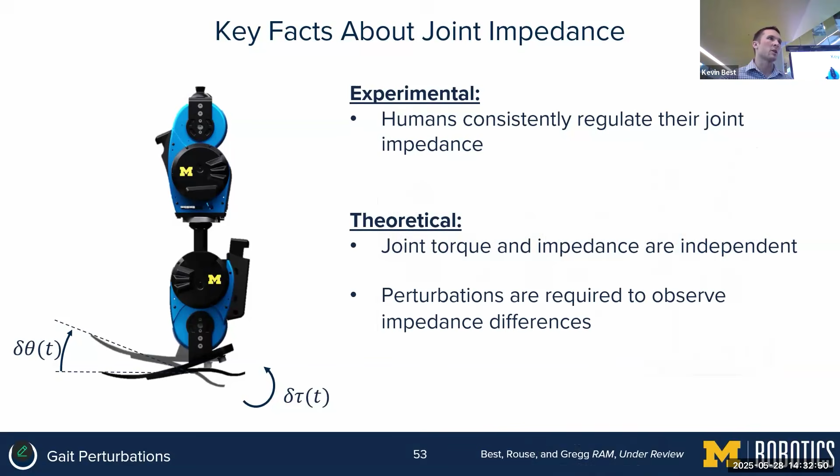I think an analogy is really helpful here. Imagine you're driving down the road in this old Cadillac, which has a really low impedance suspension. When you hit a bump, it'll be fairly forgiving - you might bounce a little bit, but it'll be pretty smooth. This would be different from if you hit that same bump in a sports car, which would be much rougher because it has a high impedance suspension. When you're just driving down the road, you might not notice a difference between these two cars, but as soon as you hit a bump or a perturbation, you would be able to tell the difference.

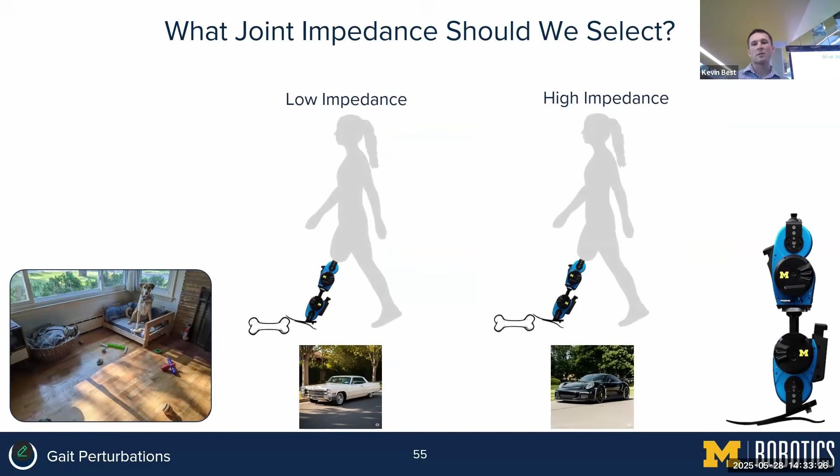Prostheses are the same way. So let's say it was dark and you stepped on this bone that my dog Lila left out - the response would be very different in low versus high impedance conditions. A high impedance would cause a much greater change in your centroidal dynamics compared to a low impedance one. While we know that these would be different, we don't know which one was necessarily better. So what we want to investigate is how the selected impedance affects someone's nominal gait, as well as their ability to withstand gait perturbations.

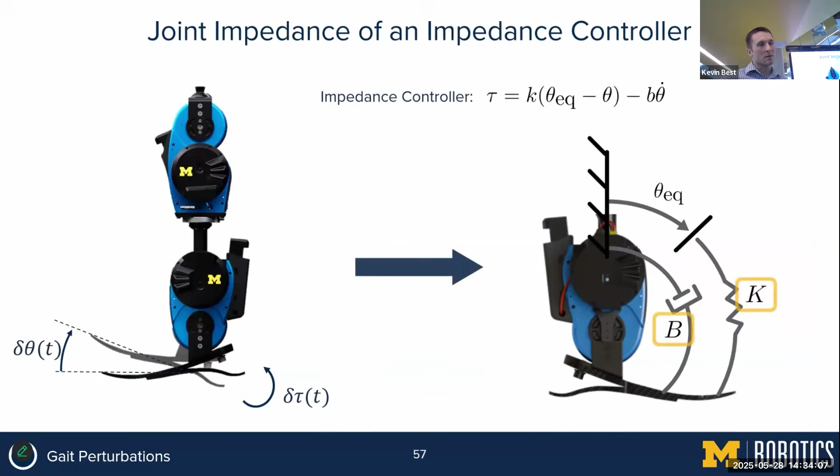In an impedance controller - I know I'm using the word impedance a lot, I apologize - the impedance of an impedance controller is determined by its stiffness and damping. So by changing K and B in this controller, we can change its perturbation response.

We did a pilot study where we generated an array of different stiffness and damping behaviors to see how they affected the user's gait and their ability to withstand perturbations. We chose these different behaviors such that they span the space of possible impedances - we have very low ones, very high ones, and various shapes. We also included the able body impedance behaviors that were identified in those perturbation experiments I showed you earlier. That is condition A.

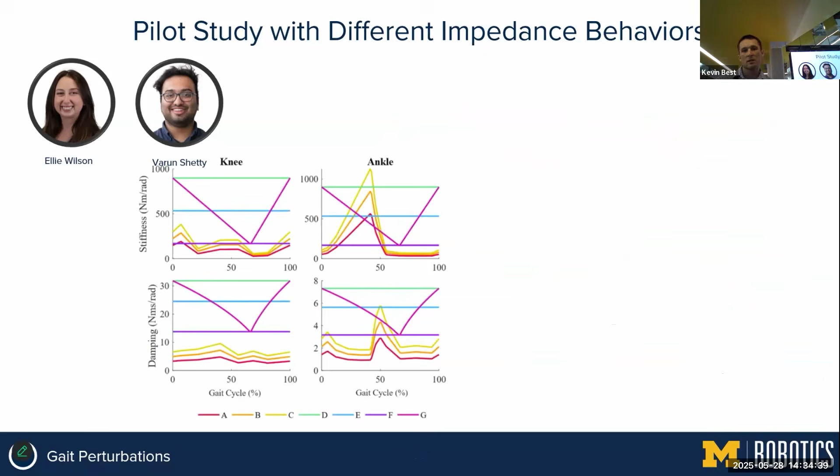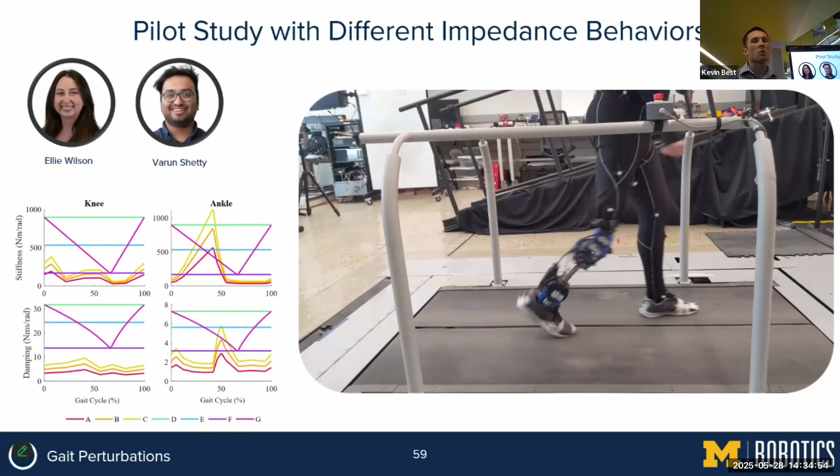We had a participant walk on each condition on a treadmill while we recorded their kinematics and the forces they created. We applied random surprise perturbations that simulated either slips at heel strike or slips at toe off by changing one of the belt speeds. If you watch, it'll pop up and say perturbation - you can see either the foot stops or it accelerates quickly. In addition to quantitative measurements, we also asked the participant about his own perceptions of each condition.

We confirmed our theoretical result that different impedance behaviors produced minimal differences during nominal unperturbed walking. Here I'm showing the kinematic and kinetic traces of the knee and the ankle, which are largely similar despite the big differences in impedance. While we had previously shown that this should be true theoretically, this was the first time that we demonstrated it in hardware.

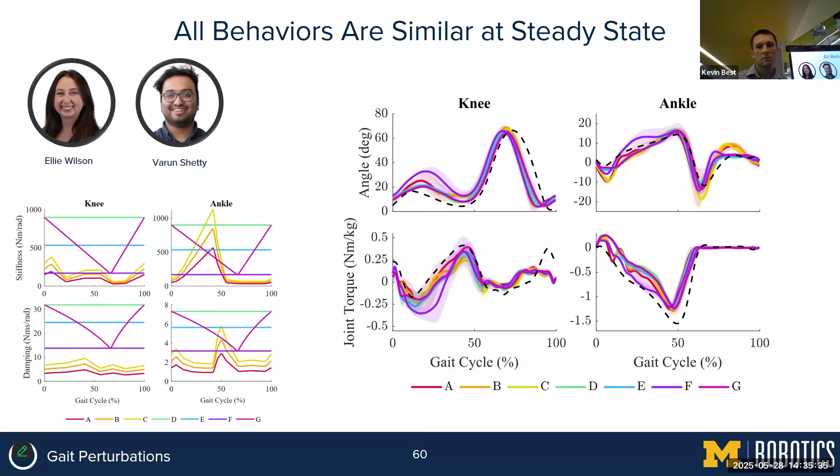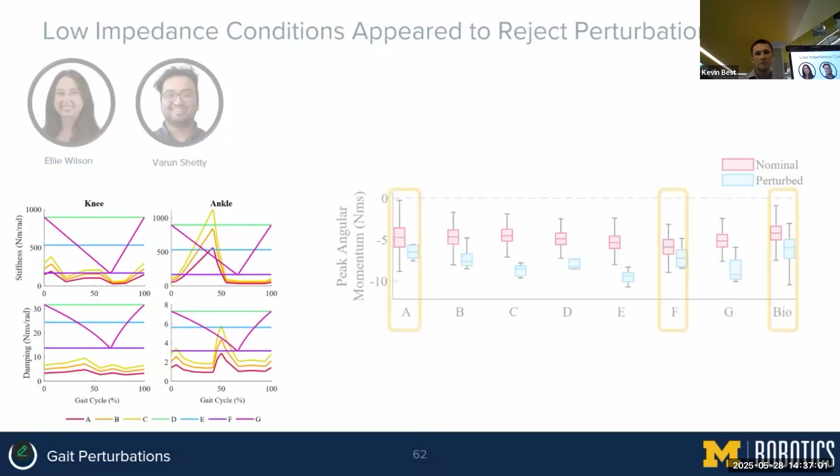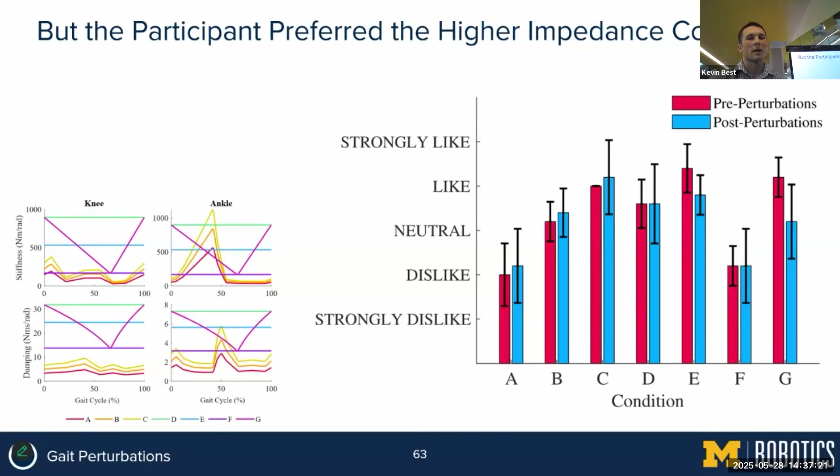However, when we asked the participant how he felt about each condition, he consistently rated the higher impedance conditions, C through E, better than the low impedance ones. So even though A and F appeared to reject the perturbations better visually and scored better in terms of stability metrics, the participant disliked them compared to the higher impedances.

So this was just an initial pilot study for this project, and we need to perform more analysis and have more participants to make any strong claims, but we do have some initial takeaways.

First, we showed that different impedances can have minimal effects on the nominal kinematics and kinetics. And this confirms our prior theoretical results.

Second, we showed that impedance has strong effects on the user's perturbation response in terms of kinematics, kinetics, and common stability metrics. And this highlights that impedance is an important property that should be considered when designing a robotic prosthesis that could experience perturbations in the real world.

Finally, we saw that the user had strong, consistent preferences regarding the impedance choice, and that his preferences didn't necessarily align with the conditions that maximized our stability metric.

But to this last point, it's important to note that it's really difficult to define, quantify, and measure walking stability, and there's a lot of future research that needs done here to fully understand this discrepancy.

So just as a final recap of what we talked about today, we started by developing a new control algorithm that enabled biomimetic behaviors across different tasks while still maintaining clinical viability.

Then we developed the control theory necessary to deploy this controller on additional prostheses with more complex drivetrain dynamics, broadening our potential for clinical impact.

We investigated the ways in which our control methods could bring tangible benefits to users' daily lives. And we're continuing this partnership, and after graduation, I'll be working with Össur on ways to integrate our control approach with their existing products to hopefully bring these benefits into their mainstream clinical practice.

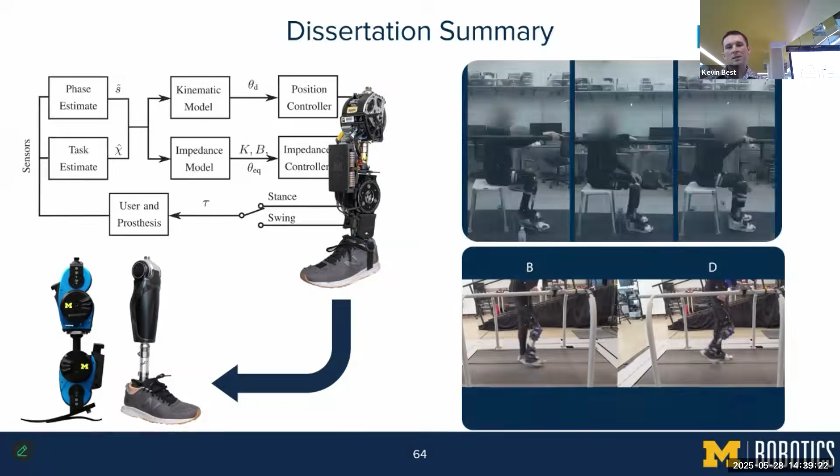Lastly, I just want to share what is probably my favorite video from grad school. We were showing off some of the features of phase-based control, trying to get Össur excited about it. And Andrew almost killed Brenda's very expensive camera. So we've gotten a lot of mileage out of this video, and it's excellent.

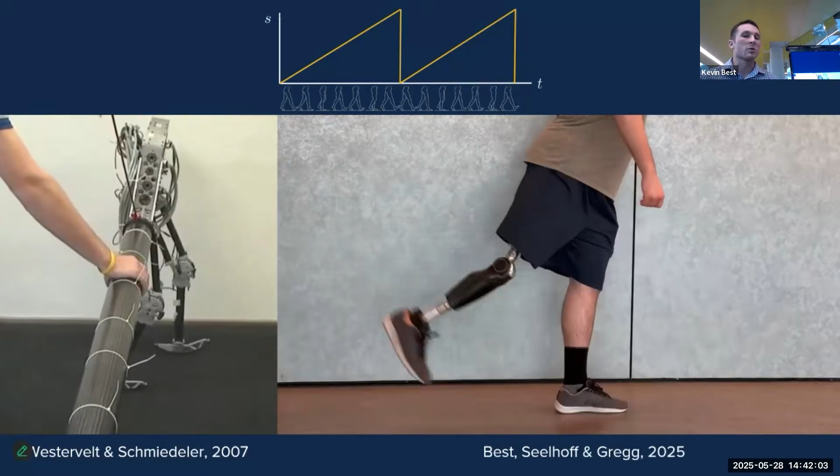So Jim, thanks for the advice, and I'm very glad I took it. Beyond career advice, Jim's research has directly influenced my own. He and others like Eric Westervelt and Jessy Grizzle pioneered this idea of using a phase variable to control gait in a robot, and this has been instrumental in making our control algorithms work on prostheses. It's just cool to see how research builds on each other and how you never know where your research is going to go.

I also want to acknowledge all the people who make robotics here run: Denise, Dan, Damon, Kimberly, Christina, David. I'm sure there's someone I'm forgetting, but thank you for all that you've done for me and all that you do to make this student experience here so amazing.

To all my friends outside the lab, I wasn't gonna cry. I'm not gonna cry. I'm very grateful for you and for all the fun that we've had together. Many of you are either here in person or on the Zoom call, and I really appreciate all the support. All of you, whether you're here in Ann Arbor or far away, you enrich my life, and I'm very grateful for you.

Lucy, thanks for being by my side and balancing me and for all the wonderful adventures we've had together. I had more written, but I'm excited to keep going. Thanks for the tissues.

Lastly, I have the best family in the world, no pun intended. You guys support me and love me, and I love you back, and I'm very blessed to have you in my life.

All right, feelings are over. Time for Q&A.